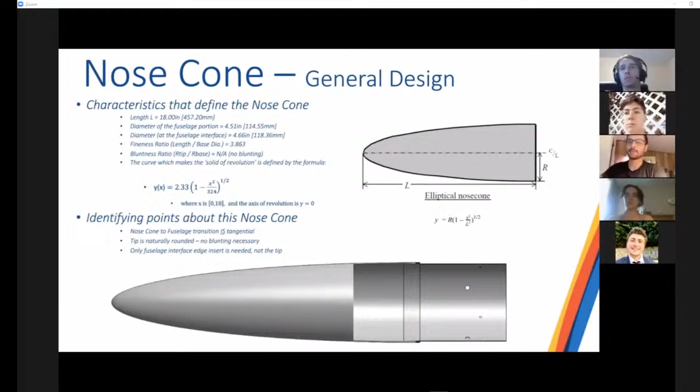So, as most of you know, manufacturing work has been going really well. The 1/3 scale nose cone has been super awesome. I've made 3 nose cones so far. I think this is the first time we've successfully made a single one-time layup and cure all at once to make one cone rather than doing 2 layups, which is super exciting because it means we can manufacture them a lot quicker, which means we can push testing a lot faster. So 2 videos have been made following the process so far.

And as I was saying, there's no tip insert for the last 2, and moving forward, we won't be using them. The fuselage insert was too thin to print this time, unfortunately, so I couldn't test with it. But the next few layups we'll be testing some different techniques as well, and just playing around with different things. There's the video links if you want to go watch it on your own time. Pretty fun learning experience.

Okay, so manufacturing tools. There's a lot here, so I'm not gonna go through everything in detail, but I'll just run through it quick. We've got the 3D printed molds, which are annealed PLA. We've got the sanding jig here, which I talked about in the video a little bit. Down here is the controls that I've implemented for it, so we've got low speed, high speed, on and off. And this is good enough for the scale model.

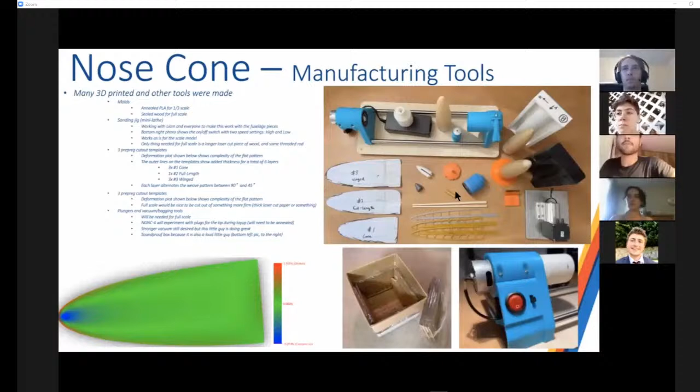All this other stuff here are just plungers for helping lay up and do vacuum bagging and everything. And this is a soundproof box because my vacuum is loud. Okay, so future work. Planning on starting the next little layup next week, changing the cutouts.

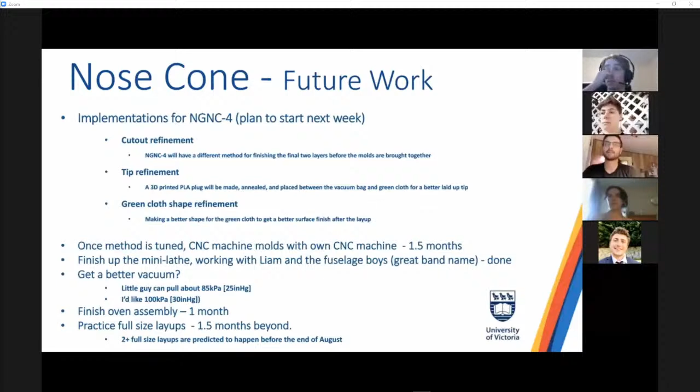Do you think the full scale will be easier because it'll be a bit bigger to do than the 1/3 scale? Yeah, I think it will be a lot easier because it's really challenging to get any tools in there and the bagging and the vacuum and whatnot. So if you had a lot more radial room for expansion of the bag, or compression of the bagging, I think it would make it a lot easier. For sure. Yeah. Cool. Any other questions?

Does anyone have any Nosecone questions before I begin? I have one quick one. If you go back a couple of slides, Carmen, I think there's some 3D printed compliant spacer things. They were in that shot. Yeah, the gold and silver ones. I remember Adam made a post about them. Do we have 3D printers big enough to make those for the full-size Nosecone? Like, are they a critical part?

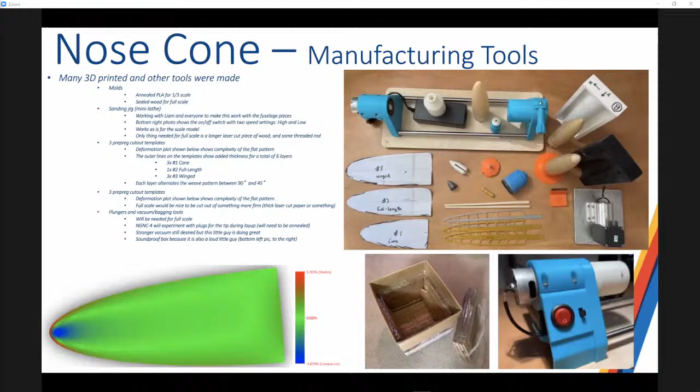They're not very critical, I don't think. I think it helps them get a slightly nicer surface finish, but with the bigger one, you'd be able to even stick your hand in, so you might not even need those. Okay, yeah. Just wanted to make sure that you didn't need like a 30-inch print bed or something. But cool. That sounds good.

One thing is that this whole process looks really good. I think he's definitely refined it, which is awesome. My one concern though would be the sanding lathe. Will we be able to scale it up to a lathe in the shop? Yeah, he thinks we can, or it'll just be good enough to do it on that little lathe. For the full size one? Yeah. Okay. We do also have a spin caster and a filament winder we can use. That is a very good point.

I'm just going to note these before I begin. Other than that, I think that process looks really good. Makes sense to me. Yeah, no, it's been going pretty well, which is very nice. All right, guys, I'm just going to take a quick drink of water before we start the air brakes. Oh.

So essentially, the function of the air brakes is to slow the rocket down using an algorithm so we can hit our 10,000 feet. And it also couples the upper and lower fuselage together. Another thing I forgot to mention is it'll allow us, on this rocket, to get some data on how they actually perform in flight. That's not just theoretical. So it's all aluminum except for the fasteners, post and plate design, and has a NEMA 23 stepper motor, which controls gear-driven flaps, which are the things that slow it down. Next slide, please.

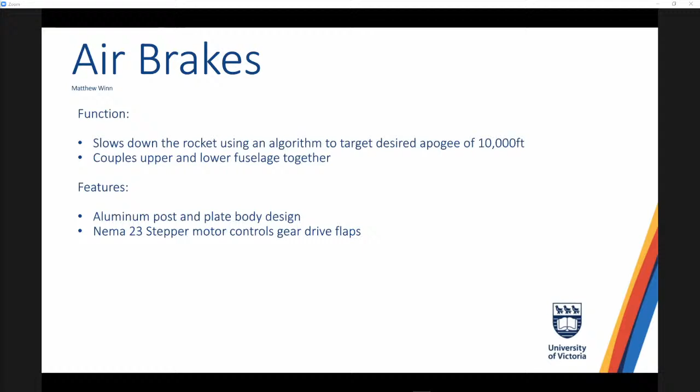For the electrical design, we have 2 A4988 stepper drivers wired in parallel, so we can bypass the current limit on them and get the full current to the motor. Those are located on a breakout board on the avionics bay, and they're attached to the Raspberry Pi in avionics.

Do you want to play that YouTube video, Carmen? I don't know if I'll mess up your full screen. It can just be small, that's fine.

So there's the breadboard, that's pre-parallel, but I've been running them in parallel now and it's been working good. So as you can see, it's pretty cool. I didn't put it in there, but the positions in that video were full, half, 3/4, quarter, done, I think. So yeah, the stepper motor is working pretty well for us.

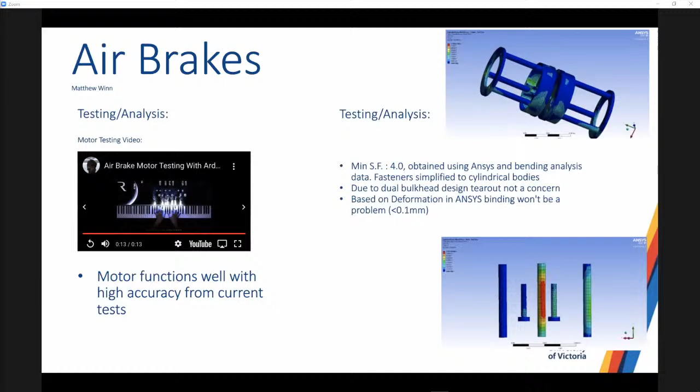Due to the dual bulkhead design, tear out isn't a concern because we have lots of set screws. And based on deformation in ANSYS, binding won't be a problem; it was less than 0.1 millimeter in the direction of the bind. Next slide, please.

Software-wise, this is where we have a lot of the work ahead. Connor and Ben have been working on it, and I have pretty good faith in them. So we're going to integrate the existing MATLAB code that the previous guys made and is semi-completed, and change that to Python for the flight computer.

The way the algorithm works is it provides a target CD, coefficient of drag, to reach our goal apogee. Then a second part takes that CD and gives us an angle for the air brakes, and through that angle, we get a step for the stepper motor, which is communicated to the stepper motor through the flight computer. This is pretty cool because it allows for minor real-time adjustments during flight. I talked to Connor, he said he should be able to finish the software within the month. Next slide, please.

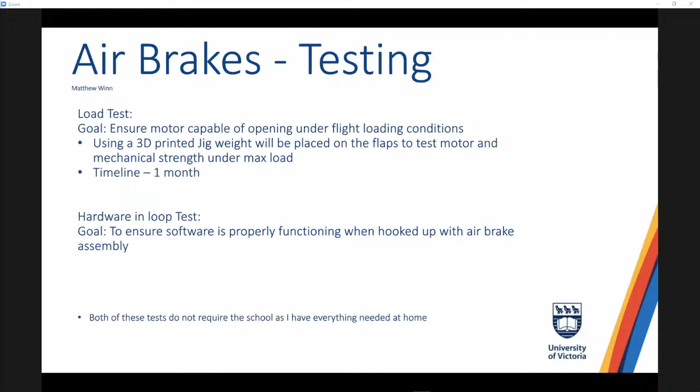And then hardware in the loop test. Once the software is done, we would want to, with the past data and predicted data, run some hardware in the loop tests and see as it goes through the whole process if it works. So that'll obviously be done once the software is finished. And as I said, both of these tests do not require the school, which is nice, so we're not really waiting on anything for those. Next slide, please.

I'm not sure, I can't remember what their budget was. Devin, you might be able to answer that a bit better as you've just seen the geometries and stuff. It definitely wouldn't be easy, it's quite a complex assembly. With time only dedicated to that, after hours, it might be like a month of work potentially.

Yeah, in their initial report too, I didn't test impact, but their impact safety factor was slightly above 1, I think it was like 1.05. So they should, big asterisk, survive impact, but obviously I can't guarantee that.

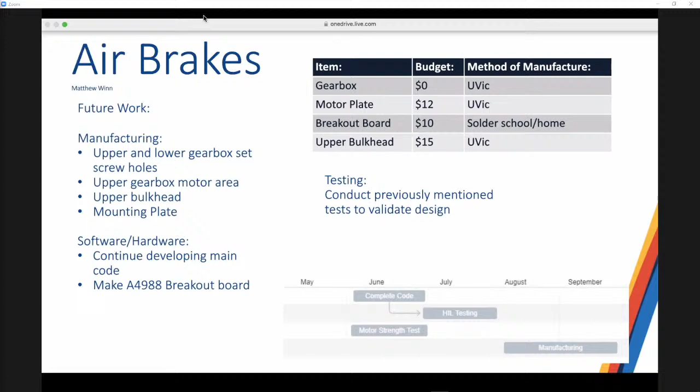So to validate this, first we determine the expected loads, then we find the composite properties, and from there obtain the safety factor. To determine the expected loads, we need to determine the failure methods, and we analyze set screw tear out, compression, and bending. Next slide, please.

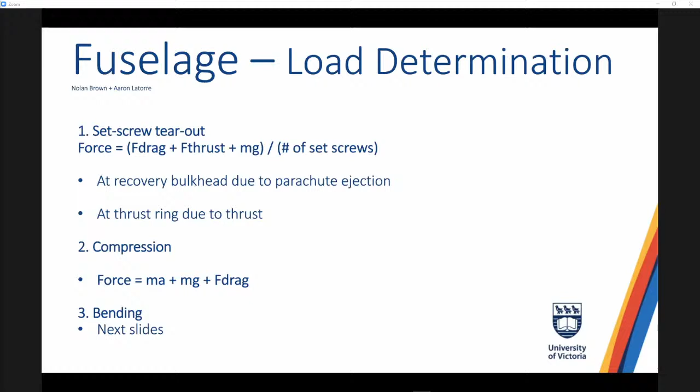Set screw tear out and compression are fairly easy to analyze. There are simple equations with drag and thrust, as well as acceleration and the weight of the rocket. We analyze these at the recovery bulkhead due to parachute ejection, and at the thrust ring due to thrust. Bending is a bit more complicated, so I'll talk about that in the next couple of slides. You can go ahead.

So essentially we do a bending analysis. It's an aerodynamic force analysis to determine the loads on the rocket during flight. To summarize the whole process, we model it as an unsupported cylindrical beam. We cut the rocket into sections at each bulkhead, because the masses of the subsystems are transferred to the fuselage through the bulkheads. From there, we can find the lateral and angular accelerations of the rocket.

As well, we'll have lift in the nose cone, the fuselage, and the fins. They act laterally on the rocket, and these all cause rotation. The main inputs here are centers of pressure, obtained through Aerolab, as well as the lift coefficients. It's highly dependent on the CAD. The centers of gravity, moments of inertia, and subsystem masses are all obtained through SolidWorks. So the output here is only as good as the CAD. Next slide, please.

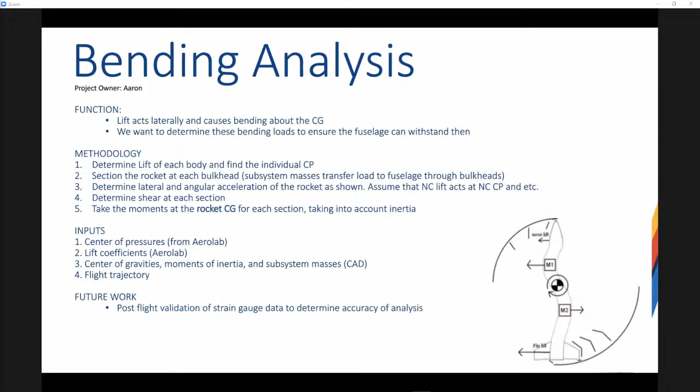I'm not going to get too into details here, but this is a force diagram. You have the center of gravity, the nose cone lift, and angular acceleration. The other lift surfaces are the boat tail and the fins. And so we have equations for both shear and moment, obtaining the lateral acceleration and the angular acceleration. Next slide.

So this is just a sample section. We cut it at some arbitrary point along the rocket. The second equation is the equation for shear: acceleration and the lift in the upper portion of the section, in this case the nose cone. The bottom equation is the equation for moment. We have three terms. The first one is an inertial term, the second is the moment caused by the lift, and the third is the internal shear. So again, we do this at every bulkhead, essentially. And you can see on the next slide,

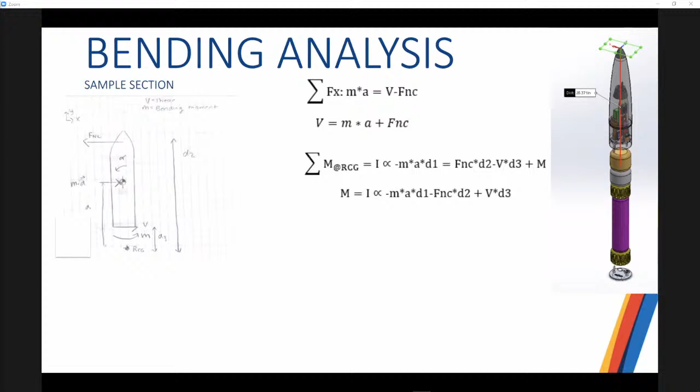So we've been pretty limited in our manufacturing testing. For the data that we do have, we have previous tear out data of around 1100 newtons to tear out one screw in a 6-layer composite. I'll talk about this main concern later when I get into the safety factors.

For our tests, we're going to do 2 main tests. One is, as I was saying, the tear out, and the next is flexural testing. This is to get a flexural stress on the composites to provide a safety factor for bending. And we'll do this using a 3-point bend test once we get access to the university. Next slide.

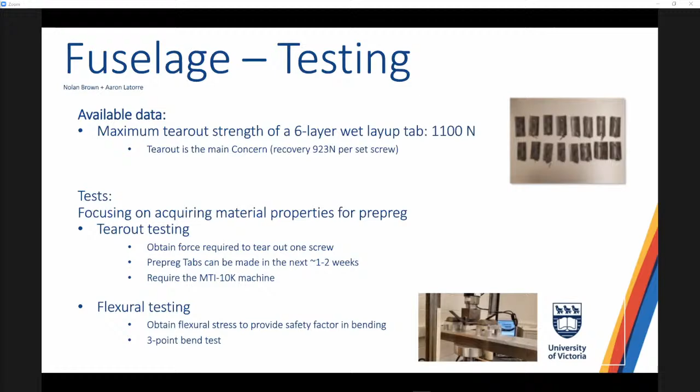So using a pre-preg test plate that Nolan made, main thing to note is it wasn't under vacuum, so future dimensions and properties will be better. Converting that plate to our fuselage will require around 9 layers of pre-preg to get our 75 thou thickness.

So we have 2 main plans for the makeup of this fuselage. One is pre-preg, which is our plan A. We estimate the mass to be around 1 kilogram. It'll be 9 to 10 layers. If this doesn't work, we'll go back to our wet layup. To obtain the same thickness, we have 9 layers of Textreme. We have all the material in hand. We know how to make it. It is less than ideal, of course, compared to pre-preg.

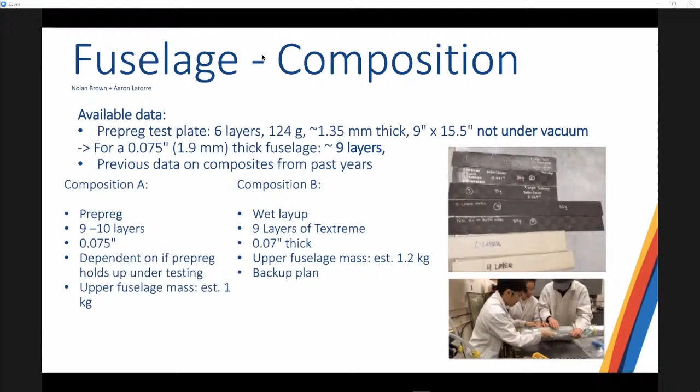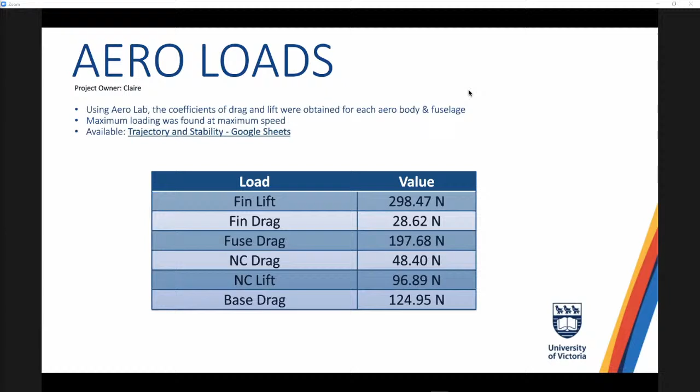Okay, that was sort of it for fuselage. Claire, you can try to bring this one up, and then we can take questions after. Yeah, so basically we're kind of tag teaming aero and flight dynamics for all the airframe stuff. Flight dynamics does loading, aerodynamic stuff. So I calculated all the aero loads. Basically using Aerolab, it'll spit out all your coefficients of drag and lift for each piece of the airframe, like nose cone, fuselage, boat tail. And I found that at our maximum speed, max Q, that's basically your maximum loading, because drag and lift are a factor of velocity squared. And these are all the results. If you need the data, it's in that spreadsheet I've linked there. Just pretty simple drag force and lift equations. And that's it for the fuselage.

Any questions for the fuselage? I just had a question about where you got that value for the load on the recovery bulkhead, because 900 newtons seems really, really low. Because we still have preliminary numbers, but we were getting maybe 1,500, 1,600 pounds. Claire, you might want to answer this one. Yeah, I was working on them with that. I gave them 1640 pounds as the total load, but it's 900 per set screw. Okay, that makes more sense. I was worried, I was like, oh man, this rocket is not going to survive. Oh yeah, these are forces per set screw, so you just divide it by set screws. Okay. Perfect. Thanks. One more question.

You're using a lot of numbers from previous launches, and we haven't had antennas on the outside of the rocket in previous launches. Specifically, I'm looking at your 4-layer twill, 1-layer fiberglass numbers. Do you anticipate any of them changing given the difference in distribution of material, since there will be kind of a bump on one side? Well, yeah, that's something we should test. We haven't really worked together too much regarding antenna. So once we start making these, some of the tests that we are planning to do is with that antenna. So we'll talk to you about that. But again, the 4-layer twill, 1-layer fiberglass is a lot thinner than it would actually be, and therefore weaker versus our anticipated 8 or 9-layer. But we do definitely need to test bumps as well as with the strain gauge.

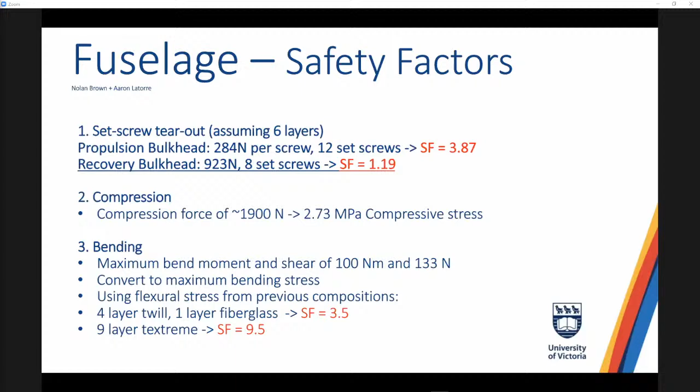Aaron, I'm not really experienced with what we've done in the past. How big is the hole, sorry? It's 3/8. 3/8. That doesn't seem like it'd be too bad, especially since I think we've had bigger cameras in the past, but something to think about again. Plus, you guys are planning to put a backing plate kind of thing behind the camera, so it's not like it's just an empty hole into the avionics bay. For sure. Yeah. Thanks, guys. That's everything.

Okay. Before I start the fins, I just had another thing about the change in temperature cracking the fuselage. The coefficients of thermal expansion for fiberglass and carbon fiber are both pretty similar. So there shouldn't be too many issues there. But yeah, definitely something to look into. Anyways, let's get started with the fins.

The design should look pretty familiar to everybody. It's a very similar design that we used on Hyak-2 and that we plan to use for Hyak-3. The only main difference is that everything was designed to be manufactured in-house. So the fin foot will be made from 6061 aluminum angle stock from McMaster. There aren't too many exotic looking curves on it. It'll be a lot easier to machine. As you can see in the bottom picture there, there's some pockets cut out as well to save machining time and weight.

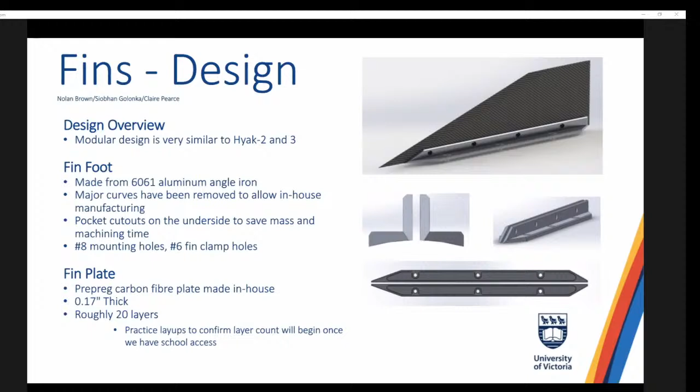And then the fin plate will be made in-house as well. It'll be a pre-preg layup. It's going to be pretty thick, probably 20 layers. We haven't done anything that thick before, but we don't see there being any problem with that. Should be all good. Next slide.

So testing. In the past, we've had a couple problems testing our fins. The main reason being they were so overbuilt and so strong that we couldn't get any results for deflection, since our jigs were basically too weak and the plate was just incredibly strong. So we've been looking into that a little bit, trying to see if we can get some different jigs, but we've also shifted the majority of testing to FEA and CFD. I'm not going to go into that. Claire will talk about it after.

But as you can see, there's the three physical tests we still plan to do. It's sort of a backup plan testing method, but we do hope to still get three safety factors from that. And then in the top right is just a quick timeline of how we plan to do everything. But yeah, that's everything for the aerostructure side of the fins.

Hi. So onto the flight dynamics side. So first, we got the sizing. Basically, if you don't know, the fins are responsible for stabilizing the rocket. They basically bring the center of pressure aft. In general, increasing stability is increasing drag. So the sizing is kind of balancing performance versus stability.

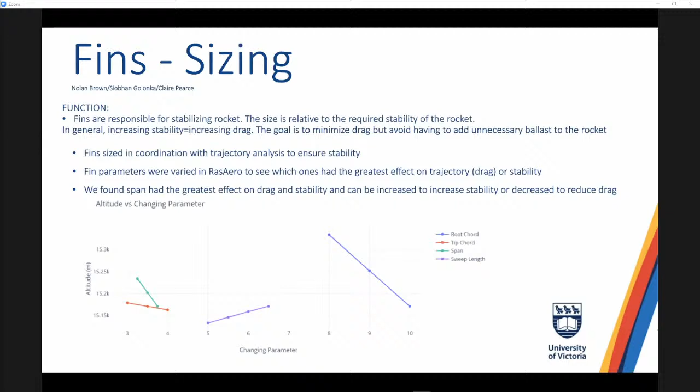One of the flight dynamics members, Karnika, helped me with this. So the bottom axis there is inches, and the y-axis there is altitude. Basically we found the center of pressure, found how much ballast we needed, and tested how the apogee changes. Basically, as expected, any increase in area is an increase in drag, and the span has the greatest effect on drag and stability. So that is kind of the key parameter to watch out for. So you go to the next slide.

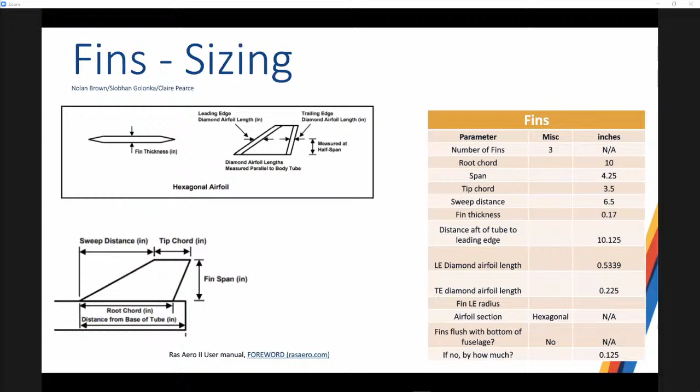So I just have some pictures to show you guys what the actual parameters mean. The fins we settled on have a 10-inch root chord and 4 1/4 inch span. Those are kind of the key parameters. If you guys want to read through the rest, you can. And 0.17 inches thick, as Aero said. Yeah, so they are smaller than the Hyak-3 fins. So they should be less mass, less drag, but they're the size we need for our stability. And so if you move on to the next slide.

So yes, Flight Dynamics is in charge of the structural analysis, like failure analysis of the fins, theoretically at least. So we're concerned with the fin under bending load from lift and also with fin flutter. So the first thing we did was just run a really simple FEA with the estimated lift and drag as a point load in the center of the fin, just as a sanity check, because you don't want to dive right into FSI and have some super whack results. I don't have the results because they're not super accurate to what's actually going to happen, but pretty low, like a couple of megapascals.

Next, we did a one-way static FSI, which basically means do a CFD sim, get a pressure plot, put that into FEA, get a stress plot at Mach 1.2 and 1 degree angle of attack, basically wider angle of attack, higher lift loads. But it seems like we should be expecting a narrow angle of attack from previous work and research. Because we don't know material properties, I just used the carbon fiber prepreg option in ANSYS. And we modeled it with all the bolts.

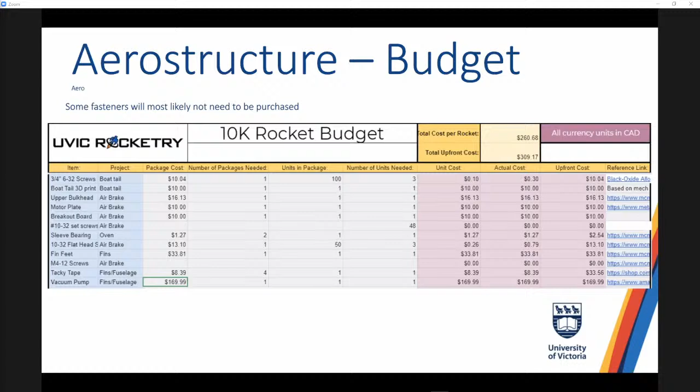There's the Aerostructure budget. I also didn't know. I just read the thing. You don't need to have budgets on the slides. So, yeah. Let's skip that.

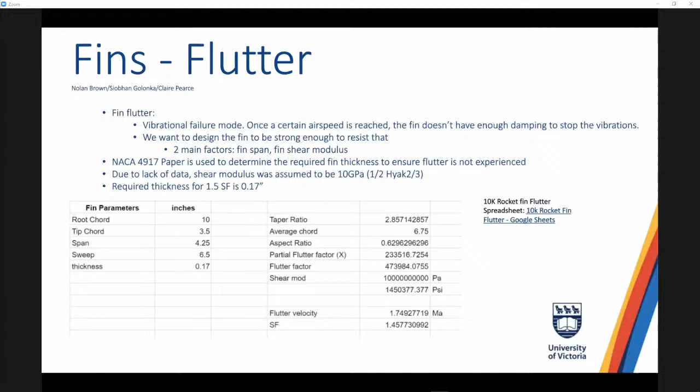One question for Claire. You used Mach 1.2 for the fins. Why? I mean, it's good to have a higher number, but since the rocket isn't going to be achieving even Mach 1, that seems like a lot. At the time when I did that simulation, that was our top speed, actually. It is slightly lower now, but we are reaching just above supersonic speeds. Cool. Okay, thanks. No worries.

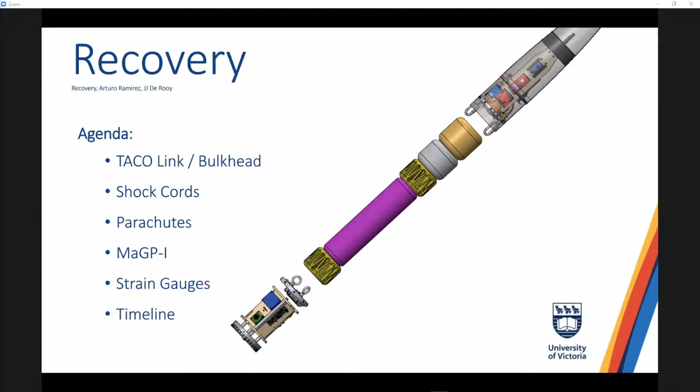Okay, so JJ and I will be talking about all these elements of our recovery system, starting with the bulkhead. So next slide, please. Okay, so here is the recovery bulkhead. Quick specs: 4.5-inch diameter, made out of 1/2-inch thick 6061 T6 aluminum, and all of the mass, that includes eyebolts, fasteners, and everything, total mass is 1 pound. That doesn't include things like the shock cords and stuff, though. This is just for the bulkhead.

For the bulkhead design, same as usual. If you've been to a Hyak-3 FDR, or whatever, you know about TACO Link. It's the usual setup. We've only made a few minor changes to that release mechanism. And one of them was that we shrank the size of the slot there just to keep it away from the radial holes. And yeah, that's actually about it for TACO Link. Everything else is the same as it was before.

And then for the drogue ejection, originally, I think in the PDR, we had black powder cups that mounted to the bulkhead. They were like a little machined aluminum cup that would sit mounted on top of the bulkhead, and that would be filled with black powder. Then that would be ignited, and that would blow off the nose cone and eject the drogue parachute. But we did a little bit more research, and we figured that we can actually just make the pocket right into the bulkhead and then have a little cap that sits on top. You can see that in the bottom of the bulkhead there. So that just saves us a little bit of space.

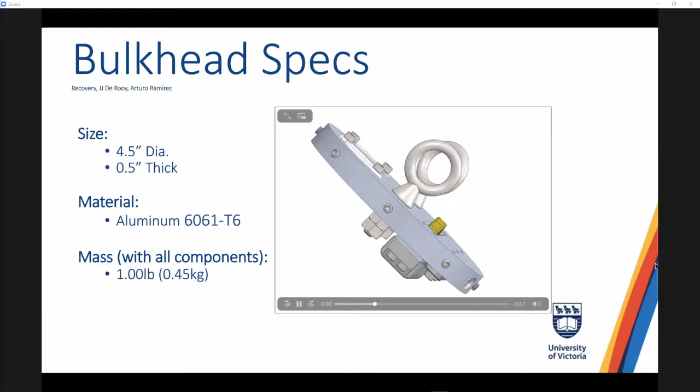And then one other small design change is instead of using an 8 contact terminal block on the back of the bulkhead, we are now using a 6 contact terminal block. That's just because we made the slot smaller, so we can make the terminal block smaller. If you go back one slide, you can see that a little bit better with that animated video. You can see there on the back that we've dropped down to a 6 terminal block. And so next slide, and the one beyond that as well.

So for the TACO Link, we did a bit of analysis on the drogue parachute. We've had issues with this in the past, getting a good number for how much load will be on the drogue parachute. And in turn, that load is distributed to the TACO Link. So this time I took a bit of a different approach, and I assumed that the shock cords are rigid and that the drogue parachute is fully inflated when the load is applied to it. That's the worst case scenario because it's going to provide the most drag.

The key difference in this type of simulation is that the load is actually the drag load on the parachute, as opposed to the shock cord stretching and things like that. So we assume that the parachute is deployed, the rocket falls, and the shock cords go tight. They are completely rigid, and the moment the shock cords go tight, the rocket fuselage is moving at a certain velocity and the drogue parachute is moving at that same velocity. Using that velocity, we can calculate the drag.

So after talking with Claire, we got our horizontal velocity at apogee, and then we add that to the velocity gained by falling back to the Earth from apogee. And we came out with a number of 255 pounds of loading.

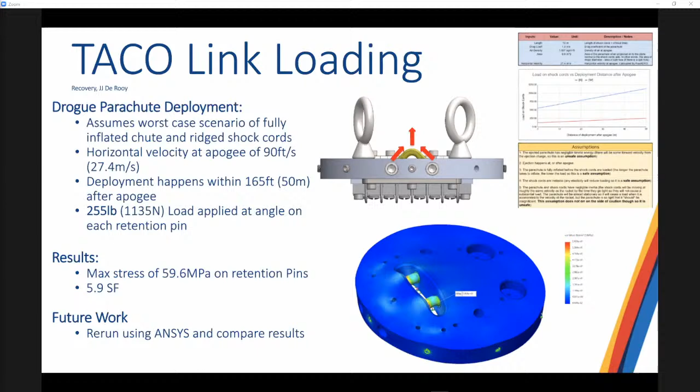So as part of our simulation, we applied that load to the TACO Link tether, which is that yellow thing there, and you can kind of see forces pull on the side. And using SolidWorks, we got a safety factor of 5.9. So in the future, we want to also run this with ANSYS, but never really used ANSYS that much, so I just did it in SolidWorks. Next slide.

And then I'll let Arturo take over here, and then I think Claire will also touch on this. Yeah, so this is the bulkhead analysis using the load from the main parachute. This is something that we had a lot of trouble calculating a right estimate. Our best estimate so far is 1,640 pound load distributed between the two eye bolts. We got this estimate from a MATLAB script that Nick wrote, but we're still having some issues on getting that right. But based on a previous estimate that was the closest thing that matched our current estimate, we expect that that is an extremely high estimate.

So once we get it right, it'll be a lot safer, I guess, than this one. So it's good that we're testing on a very high estimate. So I'll let Claire talk about the FEA. Sure. Yeah, so I did the FEA in ANSYS. I included the bulkhead, the pins, and the bushings. For sake of not having a billion contacts in ANSYS, I did not model any of those terminal blocks and stuff under, because I don't think they should affect it too much.

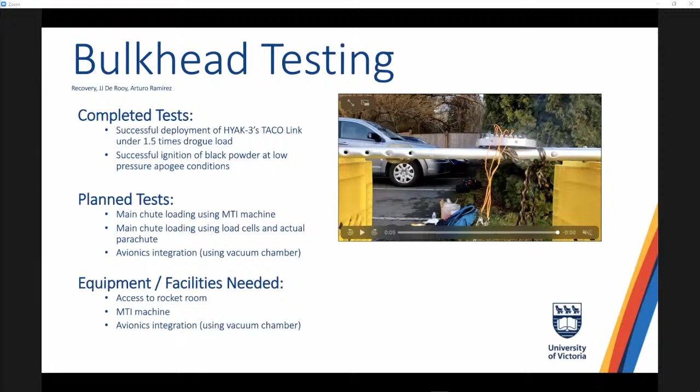We have also tested the low pressure ignition of black powder, and that was done by Paco. He created a vacuum chamber and was able to successfully ignite black powder at 10,000 foot pressures. So we're not worried about that. In the future, we're planning to do some tests with the MTI machine at the university, loading from the main parachute and also from the drogue parachute, just to double check that everything doesn't fall apart. And then we also want to do a realistic test where we take the mass of the rocket, attach the main parachute, have load cells in line with the shock cords and throw it off a building or something, and finally get a number that we can trust for the main parachute.

But in order to do that, we need access to the rocket room, the MTI machine, and also all the avionics equipment to do sort of the vacuum chamber, like low pressure parachute deployment stuff. Next slide.

So the shock cords basically just attach the parachute shroud lines to the recovery bulkhead, and there's one for each parachute. We've been having some issues as well with getting the right calculations and some good sources on the sizing of the shock cords. The strength will depend on the load once we get a better estimate for the load, and JJ is going to talk about that in a second. But in terms of length,

we haven't gotten too many great sources, but basically we just want to avoid zippering. When the parachutes are deployed, if you say this is the fuselage, it's going to have some horizontal velocity, so the cords are going to shoot out, and because of the drag on the parachutes, they're going to fly backwards. Zippering is when it tears along the fuselage. To prevent that, you need 4 to 5 times the length of the fuselage, just to give it enough time to slow down.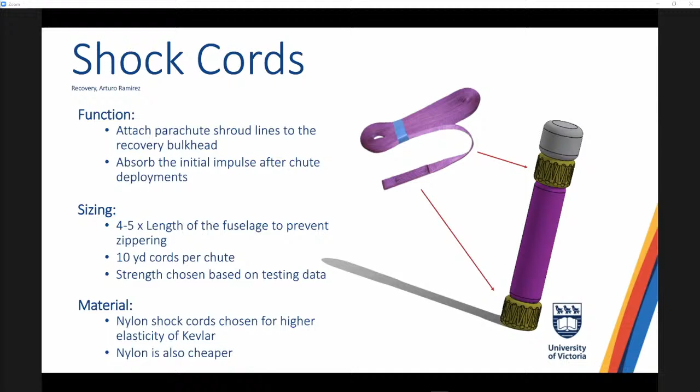So the testing for the parachutes is not too complicated. The main thing is making sure that we finish sewing the parachutes, and that's going to take probably a couple of weeks. That's the hardest thing. After that, we have 3 tests planned for the parachutes, and they're fairly simple. One of them, the shroud line load stitch test, does require the MTI machine.

So on top of requiring the university for the materials and the sewing machine, once we finish that, we're going to need the MTI machine. So it looks like we might have to wait for the university to open before we begin the parachute testing. Next slide, please.

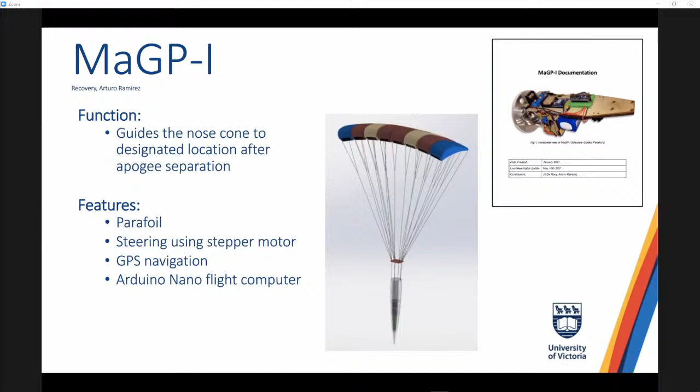Okay, so MaGP-I. I'm just gonna go over it briefly before I go into the software, which is the main thing I want to talk about. MaGP-I, which is a machine-guided parafoil, guides the nose cone to whichever location we want after apogee separation. Unlike previous years, the nose cone is going to fully separate from the fuselage, and it's going to steer the parafoil using stepper motors controlled by an Arduino Nano flight computer using GPS. So next slide, please.

The software was written by a previous student, River, but I've looked over it and I've verified it and written some pretty in-depth documentation. So if you guys want to look over that and just make sure everything's fine, you can do that. But basically, we just wanted to make sure that there were no issues with the software, and we wanted to make sure that we knew all the launch-specific parameters that we had to change for flight.

And so that includes things like coordinates, altitude, the number of circles that it's going to perform as it descends, things like that. And so using data from a previous test on the parafoil and a spreadsheet that I made, we came to a total of 17 circles that it's going to make as it descends, which would take about 40 minutes. And that might be an issue. I believe we've contacted Adam about that to see if it is an issue. If it's not, then we have some future work and testing. So I go more in depth about that in the next slide. So next slide, please.

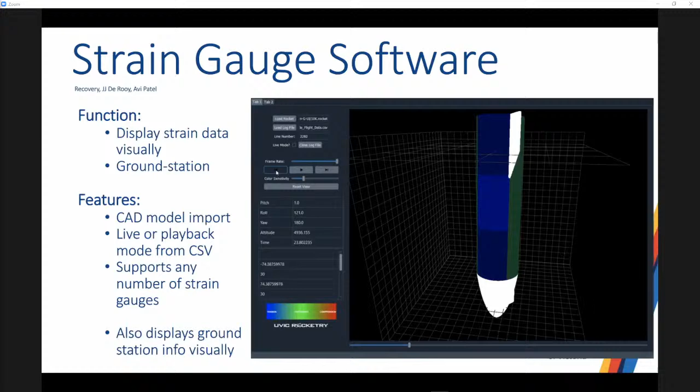And I actually have another piece of the software that I want to demonstrate live. So if I can share my screen here, Carmen, I'll show what's happening there. Thank you. Okay.

So something that we haven't really shown before is the ground station. Basically we have a whole bunch of graphs here that will display altitude, gyroscopic data, things like that. So this is kind of like a more visual version of the ground station that Avionics has, an addition to their system already.

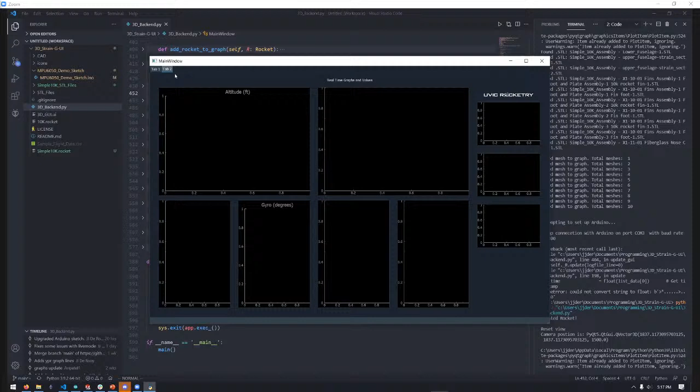And we also have support for .rocket files. So we can have different files in here, different rockets, different CAD. So I've created one modeled after the 10K rocket. This was using 10K's fuselage and things like that, so this is an accurate representation of that.

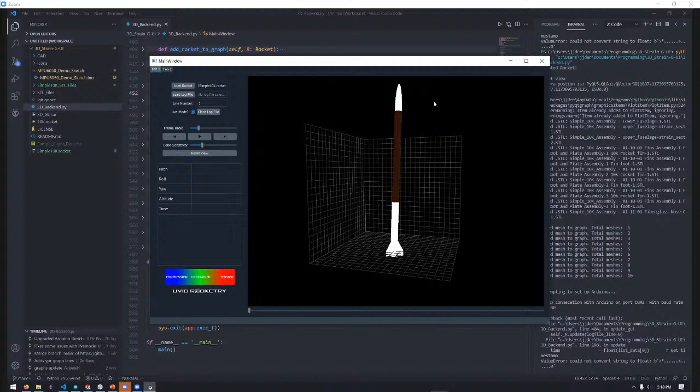And I've modified it so that it actually has 2 strain gauge sensors, which I have hooked up to a piece of metal sitting beside me here, as well as a gyroscope. So if you look at my camera while I'm doing this, I have a breadboard here with an accelerometer on it. You can see as I spin it around and move it, it moves on screen.

And then also it has strain gauges built into the rod. So if I flex the rod, one side is in compression, one side is in tension. And if I bend it the other way, one side is in compression, one side is in tension. So this is what we'll get from the actual rocket, except with 12 sections instead of just 2. So that's one of the big improvements that we've made since the PDR.

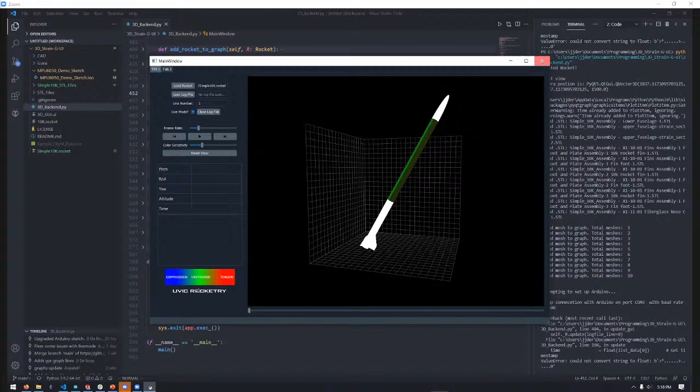So I will let you take it back, Carmen. And next slide. Okay, I'll pass it back over to Arturo.

Yeah, so the timeline is going to be very tight. As you might have noticed, all of our testing requires manufactured parts or access to the university. So I talked to Devin and he gave me an estimate of about 2.5 weeks for manufacturing. So assuming we're able to start manufacturing once we get back to the university, and that we're also going to start making the parachutes right away, then testing might have to begin probably a week or so into that, once we have enough components.

And because we do have a lot of tests, it might take us 5 weeks if we complete 2 tests per weekend, which gets us right up to the beginning of October. So it is pretty tight for a competition. We might need some help from other subsystems to complete these tests. Otherwise, we're going to be very tight on time if the competition is in October. That might be an issue. So are there any questions about anything?

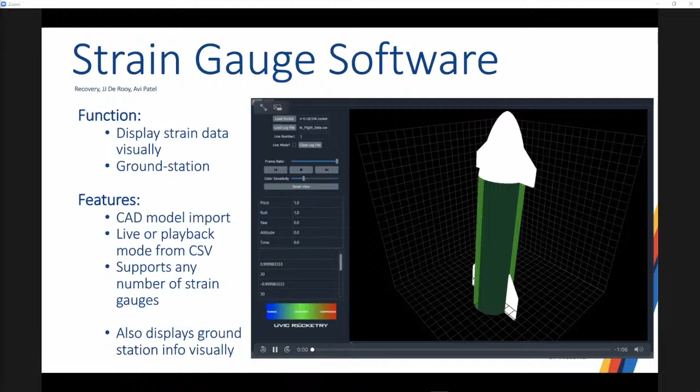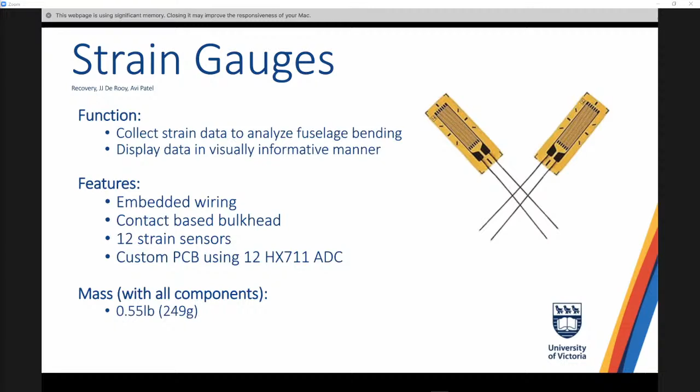Sorry, I always call it the flight computer, but I mean the avionics bay, I guess. The wires run to the avionics bay and connect to the altimeters, is what you're saying. Okay. Cool. Yes, I just want to make sure that was clear. Good. Yeah.

That 2.5 week manufacturing period, is that based on if we manufacture nothing but recovery in those 2.5 weeks? Or is that accounting for all the other manufacturing projects that are probably going to be happening at the same time? I can speak on that. That is assuming that we'll all be manufacturing everything at the same time. Obviously, we have a lot of parts that are very similar, i.e. the bulkheads are cylindrical plates.

They have very specialized processes for making those radial holes. So to streamline the process of making so many, it's easiest to make them all at the same time, because using what's called a dividing head to break up the rotation of the disc on the mill to make all of those holes is time consuming to set up and tear down. So trying to do as many as we can in one sitting is ideal. So I guess that 2.5 weeks does account for all manufacturing.

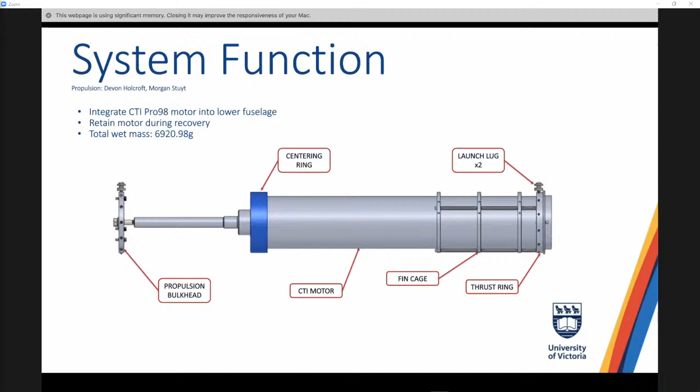The propulsion bulkhead keeps the motor in place during recovery chute deployment. In previous rockets, I know it was intended to be a backup for thrust transfer compared to the thrust ring, which we'll get into later. However, talking to Morgan, we determined that if we are bottoming out on the propulsion bulkhead and something with the thrust ring is not working out, then we probably have bigger problems. But we can talk more about that in the thrust ring section.

As you can see, it's just a bulkhead made out of aluminum. It's also the lower bulkhead for the air brakes. It's just an aluminum disc with 12 set screws, and a 3/8-16 hex bolt attaching to the extension post that was added for the extension of the lower fuselage, basically making a big screw. We have some threaded rod on the end. The required validation for the bulkhead is just loads under main chute deployment, and just for fun, we did the max air brakes load at full extension. Next slide.

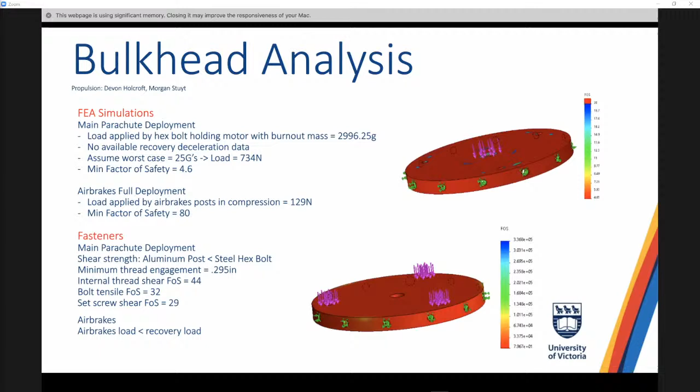So we didn't do any analysis there. Next slide. Now the centering ring. So the centering ring locates the motor radially during assembly. This is our fun 25% infill PLA version. And its features include being lightweight at only 36 grams. And there's no validation required for this guy, just for locating during assembly.

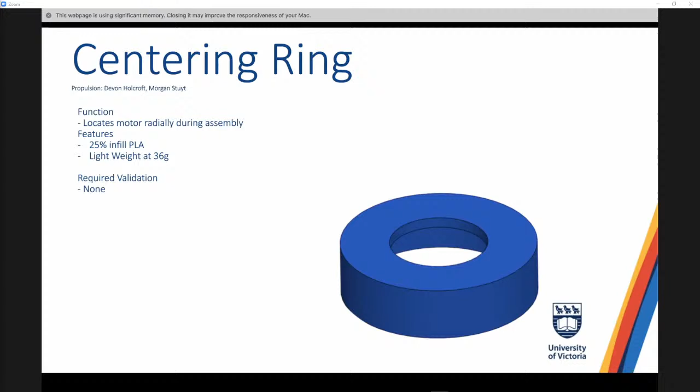Next slide. Moving on to the fin cage. So where the centering ring was at the front of the motor, the fin cage locates at the back of the motor. It also fixes the fins to the rocket. So some of the features include unidirectional weave carbon fiber posts. That was what was selected for the Hyak-3 version, and the design was kind of transferred over here.

Those are available from McMaster. I don't know too much about composites, and I don't know if there is going to be much of a difference between unidirectional versus cross-hatched carbon fiber posts. But that's what was in the CAD. And those are connected with expanding aluminum inserts to replace the aluminum posts used in previous years.

And so the required validation was thread tear out for the fins on each ring, and then bend testing on the carbon posts. Next slide. So the analysis done was pretty crude, just a worst case scenario moment arm on the fins for lift force, to calculate the tensile safety factor on that top screw. Again, over 30, so fine there.

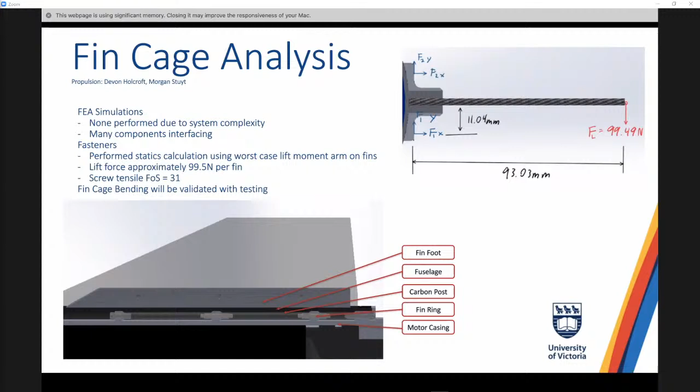In terms of the bending of the fin cage itself, no simulations were able to be performed because there are so many components interfacing with the fin rings connected to those posts, or interfacing directly with the motor casing, and then being held together by the fuselage, as well as the diameter bottom of the fin feet. There's just too much interacting to have a relatively accurate simulation, so all that bending, and determining whether any load on the fins will be transferred to the carbon posts, will have to be validated with physical testing.

Next slide. So moving on to the thrust ring. The thrust ring serves as the base of the fin cage, as you may have noticed, and it also transfers thrust through the bottom of the fuselage. It's also aluminum, with 12 6-32 set screws, and the only required validation was the motor's thrust transfer from the back enclosure of the motor. So that's in the next slide.

For another SolidWorks FEA, that loading was placed on the interface between the back motor enclosure and the thrust ring, just on the back face, with a thrust of 2,952 newtons. We had a minimum safety factor of 4.7. And for worst case fastener calculations, if for some reason we bottomed out on the set screws before the lip of the thrust ring on the bottom of the fuselage, we got a set screw shear factor of safety of about 3.3 per screw. Yeah, next slide.

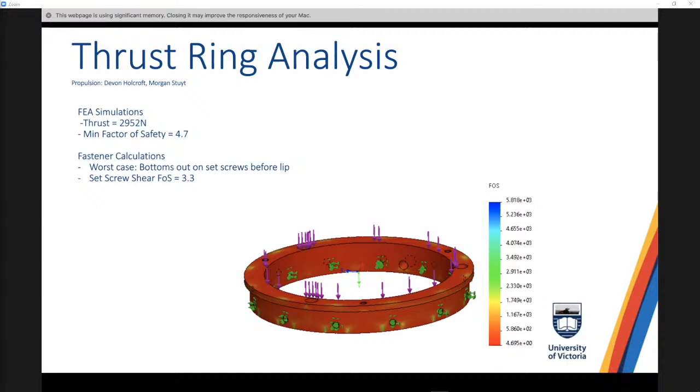So quick little diagram about assembly. How everything goes together is obviously important, and it can be broken up into two initial stages. We assemble the motor all together first, and then applying Loctite to the threaded rod, we bottom it out on the front enclosure of our motor. You can use two nuts to basically make a bolt and screw that in all the way, then put on the centering ring, more Loctite for the other end of the threaded rod, and then use a pipe wrench to bottom out the extension post onto the front enclosure.

The fin cage doesn't slide over the motor. We actually install it first, making sure the thrust ring bottoms out on the bottom of the fuselage, and then we install the propulsion bulkhead above the fin cage, threading the set screws into the fuselage, and then finally sliding the motor and extension post in. We can simply tighten down the hex bolt at the top of the bulkhead, cinching everything together and completing assembly. So next slide.

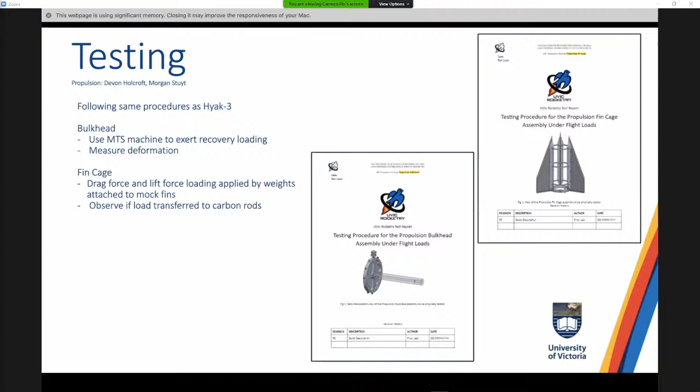And yeah, that'll be done with the drag and lift forces applied. I believe the plan is to again use a kind of worst case point load for both of those tests. The next two slides are both budget slides, which again didn't need to be there, so we can just skip those and go straight to the question and feedback period. So do you have any questions?

One thing for you to note, you mentioned you didn't know what loads to expect. We have data from a few of the previous 10K rockets, I think MVP-1, 2, and Skookum-1, so you can use data from those if you're looking for more specific expected loads. 25 Gs is what we spec the electronics for, because it was either that or go significantly below expected loads. So it's still higher than needed, but if you're looking for more accurate data, it's in the Avionics folder.

Okay, great, thank you. Yeah, that was JJ and my solution to not having any expected deceleration for this rocket, but I hope deceleration is less than 25 Gs. It has been every time previously. I just looked and we were looking at 10 Gs and 13 Gs for Skookum-1 and MVP-2. Okay, cool. Well within. Great, thank you. I'll just write that down.

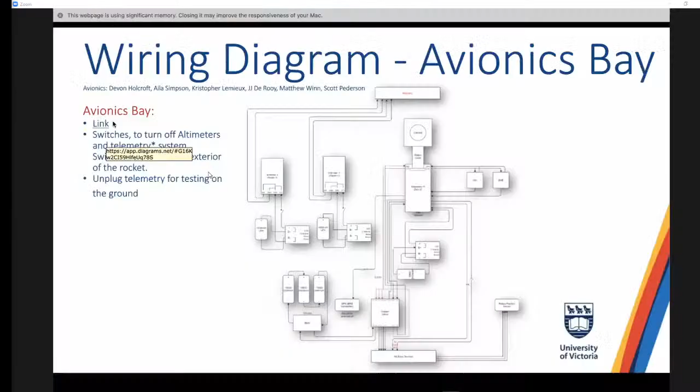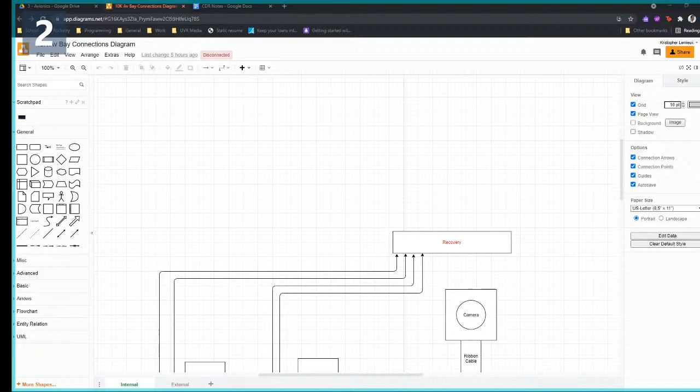I'm also biased because I put a little ninja edit into it, so I want that to show up. No, it will be really helpful once we can zoom in because we can see how all of the components across the rocket work, which is going to be really helpful.

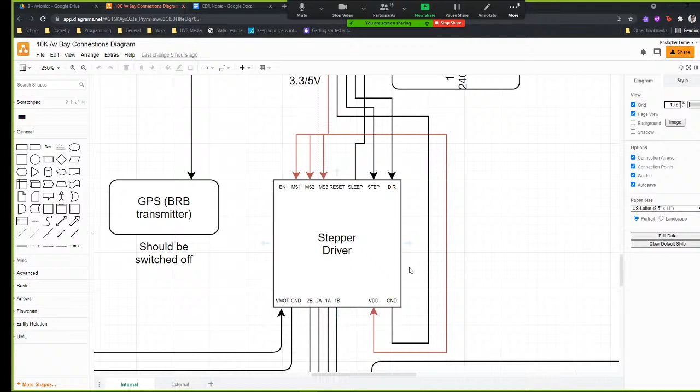Yeah, if you want to zoom in there a little bit just so people can read. Perfect. Yeah, so the main two functions of the flight computer are the direction and step pins there, and then it also provides the logic voltage to MS1, MS2, and MS3. And then the sleep, Devon let me know, it allows it to go in low power mode, so then we don't have to have the stepper motor constantly having holding torque, which uses a lot of power, until we're ready to fly. And yeah, those phases go to the motor, and it has its own external power supply.

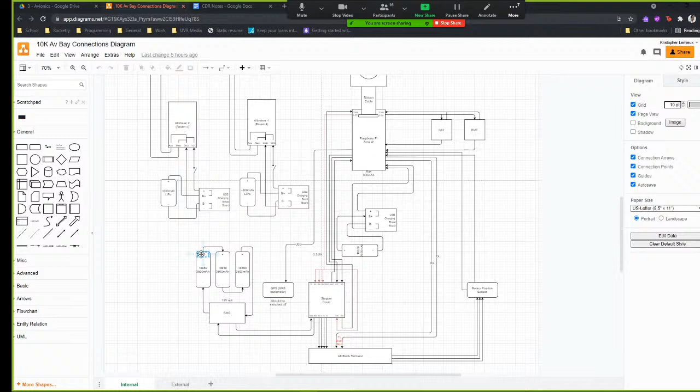Yeah, I just put it in the chat, but your batteries down there, the 18650s, they look a little backwards in terms of polarity if they're supposed to be connected end to end like that. Yeah, like plus to minus. Cool. Flipping the middle one 180 degrees would fix everything.

One thing I'd like to point out while we're on this, it'll come up later as well in the telemetry slides, but it's helpful to note here, is since we have an external antenna, we are going to have an area of the rocket skin that we're not going to want people to touch. Since we do have to carry the rocket out onto the rails and assemble it, we were trying to figure out how we can turn off the entire telemetry system while it's still on the ground.

So the fact that it connects over USB means that theoretically we should be able to tell it to not supply any power, and there will be external power going to the transmitter, in order to power the antenna up to the full 5W output. So we're just trying to figure out how we can put another screw switch, like with the 2 altimeters, onto that wire so that we can make sure that we don't give anyone radiation burns while they're carrying the rocket, because apparently that's not ideal.

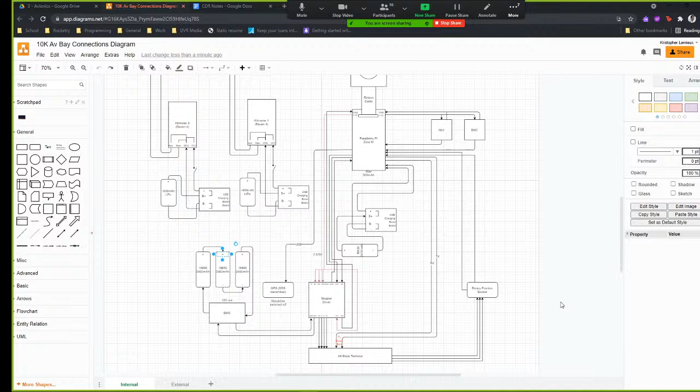I had a quick question. Matthew mentioned that the stepper driver will be on sleep mode until it wakes up. What tells it to wake up? Under what conditions will it wake up? Yeah. That is a good thing, though. We have to put that in to let the program know to start. Yeah, we're not going to have any communication back to the rocket. The rocket is sending us information. Yeah, that's what I mean. Like, just a switch so that it turns on or whatever. But that won't help. The switch is going to have to be done once it's on the rails. And once it's on the rails, it could be sitting for 6 hours. Well, not 6. We've spec'd it for 4 hours.

But we could say once the acceleration exceeds a certain amount, because that will be coming from one of the gyroscopes going to the Raspberry Pi. But we haven't tested to make sure that we can do that. It's possible, though. But if the Raspberry Pi is in sleep mode, we just need to make sure it can still record sensor data. That has not been accounted for. Yeah.

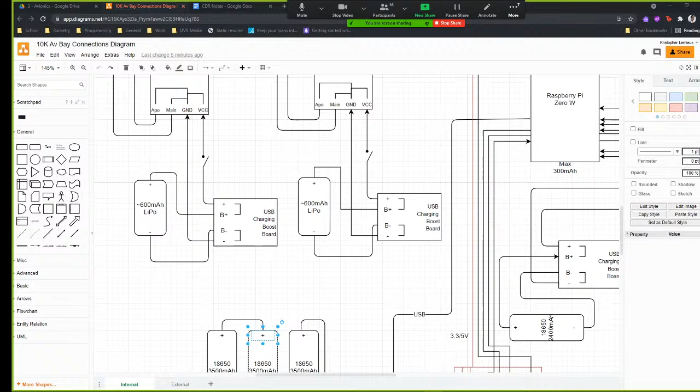Sorry, quick question: are those USB charging ports accessible once the rocket is assembled, or are they enclosed then? So like I said, there will be charging boards for the altimeters. But the one used for the Raspberry Pi is outdated from the renders. It's actually connected to the

internal battery section, so the entire battery housing is all self-contained and can be charged externally from there, but once it's inserted into the avionics bay, it's no longer accessible. Okay, thanks.

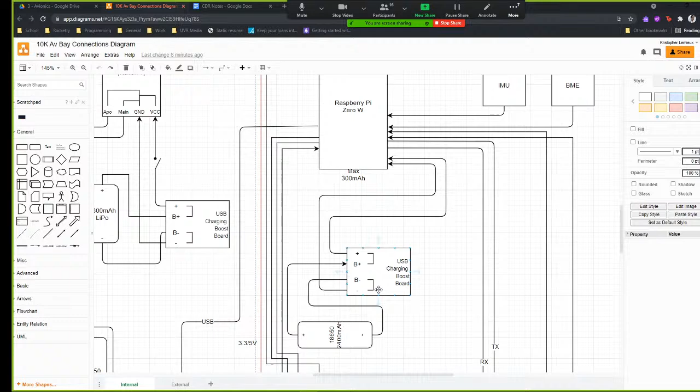Okay, is that all for this slide? Are we good to move on? Okay, I'll take that as a yes. I'll pass it back over to Carmen. Okay, so I guess we go into batteries, which is Devon.

Cool. So the batteries provide power to our flight computer, which is using one of those USB charging boards. It boosts the 4.2 volts out of the 18650 to 5 volts for our lovely Raspberry Pi, and then separately, connected to that 3 series BMS for 12 volts to our air brakes, is another 3 18650s.

That 12 volts is also supplying the telemetry system, and the telemetry system is rated for its high power mode between 9 and 16 volts. That second line is wrong. We don't need 9 to 16 volts of power to each altimeter. We're using those small, I believe 600 milliamp hour LiPo batteries, which are 3.7 volts.

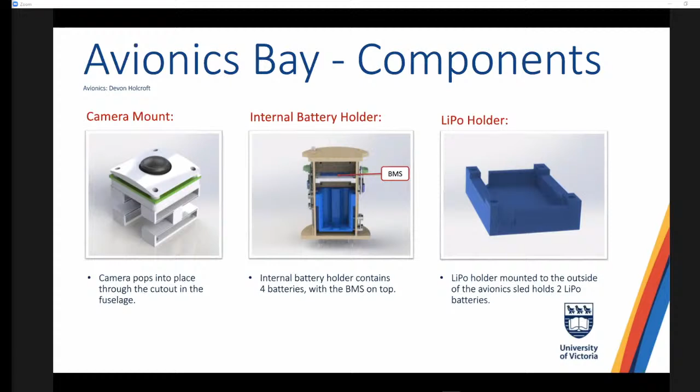Okay, we're good to go.

Okay, great. The avionics sled. So the avionics sled contains all of the electrical components as well as the batteries. It is a lightweight 120 grams. I guess that's the dry mass with just the laser cut plywood and the aluminum posts. I don't believe that's accounting for fasteners, but either way, it is just under 5.5 inches tall from the bottom of the attachment posts to the top of that top plate. And then the outer diameter is obviously the fuselage inner diameter.

In terms of testing, assembly rehearsals will hopefully be performed to tweak wire cutouts and spacing of components. Obviously, we don't want to be screaming at, well, me for designing it at 3 a.m. when we're assembling everything, wondering why we can't fit wires through different spots. And so

rather than trying to get it right the first time, we're going to make it. The laser cut panels are very easy to cut again and iterate upon. We'll be able to tweak things and make sure we're iterating for usability when wiring on launch day. But yeah, that is this. So next slide.

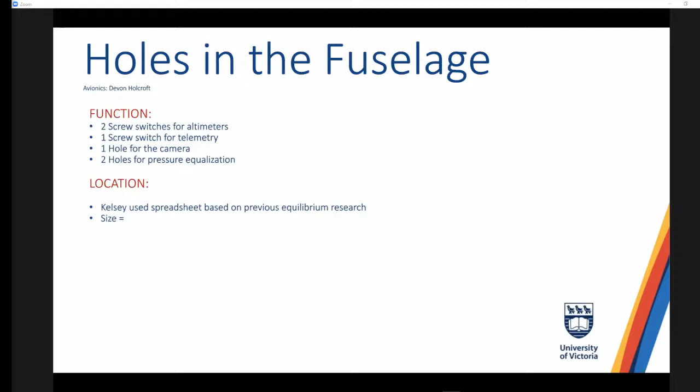Flight computer. So we selected a Raspberry Pi Zero, small, low power consumption, and it does everything we need it to. It's going to take in all of the data from onboard sensors and then configure it for storage, probably in a CSV format on the black box, as well as configuring a small APRS packet with all the data we deem to be relevant so that that could be sent back to the ground station.

It'll also be calculating the position for air brakes, taking in its encoder data and calculating how the stepper motor needs to move to make sure that they are where we need them to be. That will likely be based on a PID algorithm, so that way we can make sure that things are as precise as they can be.

So the Adafruit sensors are going to be collecting temperature, humidity, pressure, velocity, acceleration, yaw, pitch, roll, all that fun stuff. And we've calculated 23 I/O pins are going to be used. Most of these go to the strain gauges. The rest go to some various sensors. As mentioned earlier, the camera will be connected via ribbon cable, and the transmitter unit that we're using connects via USB.

Analysis and research, a lot of this is going to be done while we are programming and testing everything. We selected a Raspberry Pi, which is a little bit unconventional for UVic Rocketry, because this year we wanted to have an easy basis on which to integrate new team members, make sure that everyone felt very comfortable with what we were doing, so that everyone could learn and we could build off of that.

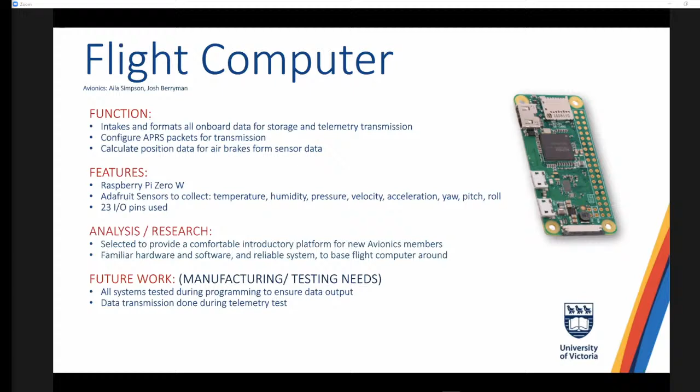Future work, testing. So all the systems will be tested during programming. We'll be making sure we can get information from the sensors, provide information to everything that we need to.

Yeah. Telemetry system. Oh, sorry. Yep, I was done there.

Telemetry system. So we have selected the Big Red Bee 2-meter GPS VHF transmitter, as well as the recommended antenna, also made by Big Red Bee. These will work together to transmit our GPS location to the ground station, along with some data points. So these transmit a signal over a protocol called APRS, Automatic Packet Reporting System.

And we can configure a small message, a small piece of text to send along with each transmission, and that is basically going to be encoded data from our sensors. So we can just put some numbers, we know what numbers to expect where, and then the ground station can receive that, decode it, and we'll have all the information that we need to know what's going on.

The antenna is 38 inches, about a half wavelength, mounted externally between the carbon fiber and fiberglass layers of the fuselage. So it'll be outside of the carbon fiber, so it is not in an RF non-transparent tube, and underneath the fiberglass in order to protect it. VHF has longer wavelength than UHF, so it was much better for long distances. The setup we're using here specifically is designed for high altitude weather balloons.

So in past years, we've had some issues with getting back data and being able to actually pick up all of the packets. Hopefully this means that we will get everything, even with whatever antenna we're using on the ground station side. The tests that are going to be conducted will be the long range distance test. So we're going to have a bunch of people go up and climb Mount Doug and then find another suitable place to transmit from. Great outreach event.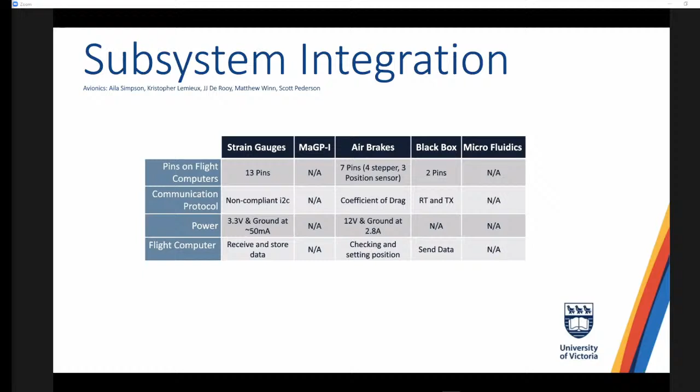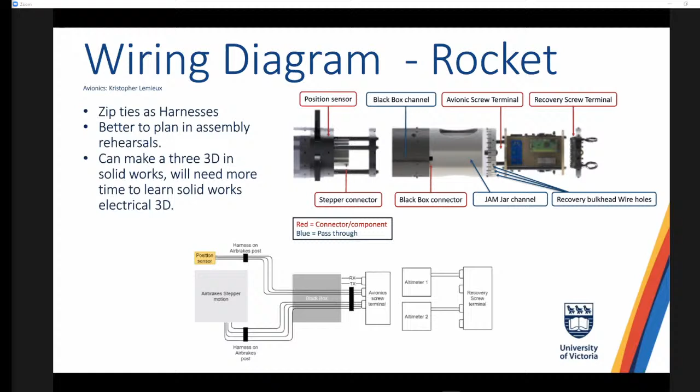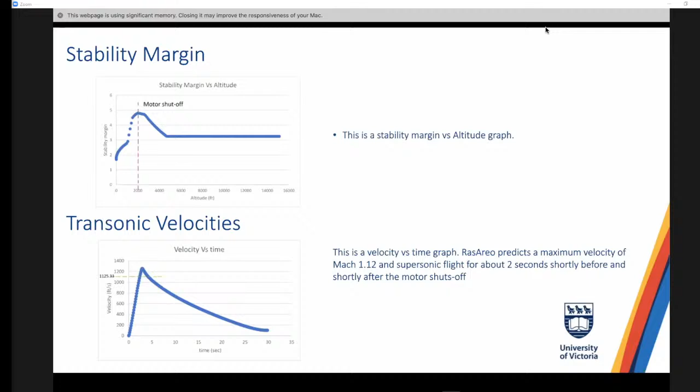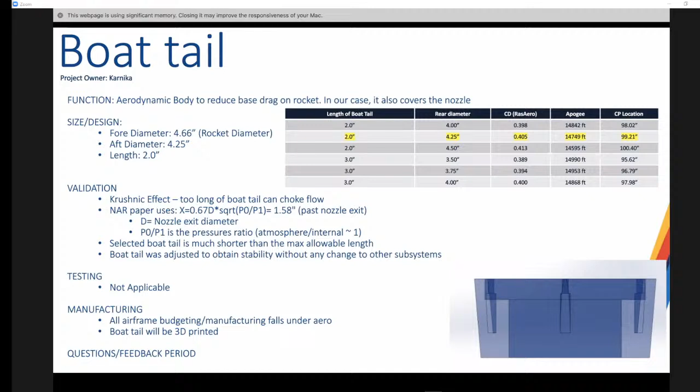We're just going to 3D print the boat tail, since we're all tight on manufacturing time and manpower. So I think it makes sense to have something that's really easy and cheap, so 3D printed out of PLA. Yeah, I think that's it for the boat tail slides. So if anybody has any questions or feedback.

So Avionics is going to need to calculate how much the air brakes need to extend in order for us to hit the 10,000 foot apogee. Might need to talk to you about that later and just make sure that we have a good equation worked out for how much they need to be extended at every point in flight. There's been previous calculations about it a little bit too, so awesome.

Just hit me up. I just realized we hadn't thought about that, but that's why. Yeah. Yeah, I can definitely try to help with that if you need more information, though. So just let me know.

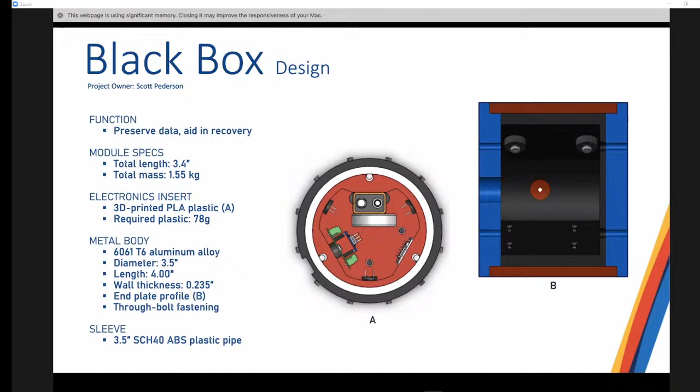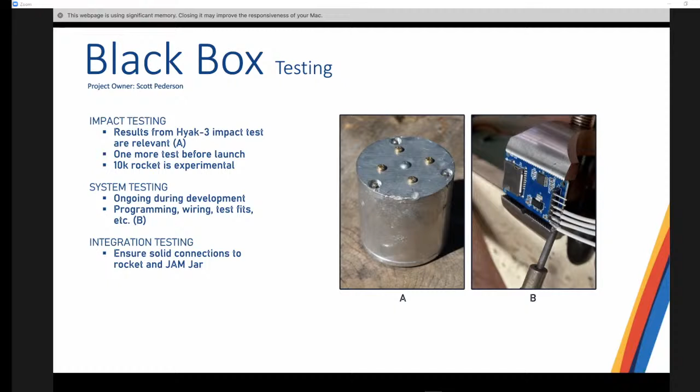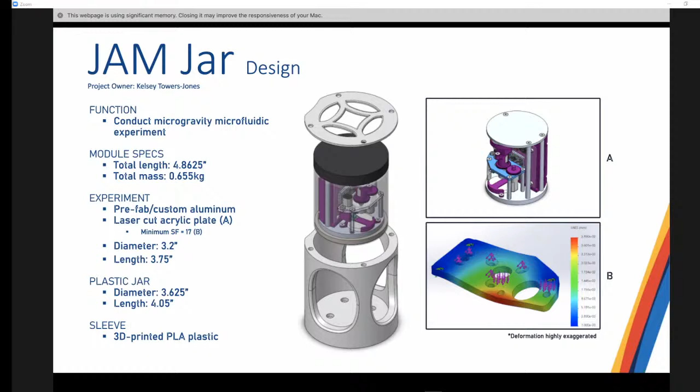Yeah, so the controls sequence is that, well, a bit of background, the batteries have enough capacity to support the system for about 19 hours. So that's not a problem. Basically, we can charge up the batteries and then leave the Arduino in its on state, just waiting for the trigger where it recognizes that apogee has begun. Basically, there's an accelerometer that will detect microgravity conditions. And once it's crossed the microgravity threshold, the Arduino will start spinning one of our control samples.

It'll put full power to our spinning motor, which will basically simulate 1G acceleration on one of our yeast samples so that it more or less doesn't experience microgravity while the other one does. And that's just during apogee, so that's only going to be for a few seconds. Then after apogee, the Arduino will turn off the spinning motor and turn on pumps that will pump formaldehyde into the yeast samples to basically kill them and freeze their genetic state in whatever it was immediately after apogee.

So that way, when we collect the assembly after recovery, we'll be able to sequence the genes of the yeast and kind of have a snapshot of whatever they were doing after being exposed to microgravity. Yeah, pumping isn't going to take much time at all. So the Arduino will turn on the pumps and then turn off the pumps and go back into its dormant state where it's just sitting there with everything off. Pretty simple control sequence. Next slide.

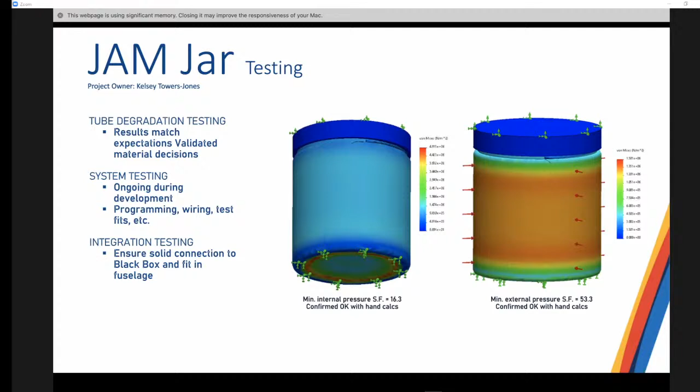Other testing is just similar: as we wire everything together, we'll be testing to make sure the sensors work and the code works as expected. And yeah, also just making sure it mounts to the black box properly. Next slide. Yeah, I can talk on this one.

So before you do, just one note about the microfluidics thing that I didn't put in the slides. For the electrical system, the batteries are 2 LiPo batteries wired in series to get like 7-something volts. I don't have a BMS wired in there currently. I didn't think I'd need one. Would I need one? If I plan on having the batteries charged separately, not in their series configuration, do I still need a BMS for when they're in use?

I think it's fine as long as you're not cycling them. That's when you run into issues. Okay, cool. Yeah. All right, thanks. That's all I had to say about JAM Jar.

Okay, awesome. So integration has already been mostly covered previously and in other subsystems. The JAM Jar mounts with 4 screws onto the top of the black box. The top of the black box has 4 threaded holes. Screws go directly into that. JAM Jar has no external connections because the purpose of it is to be a self-sufficient experiment. And we'll be needing the self-sufficiency more in later tests, later flights.

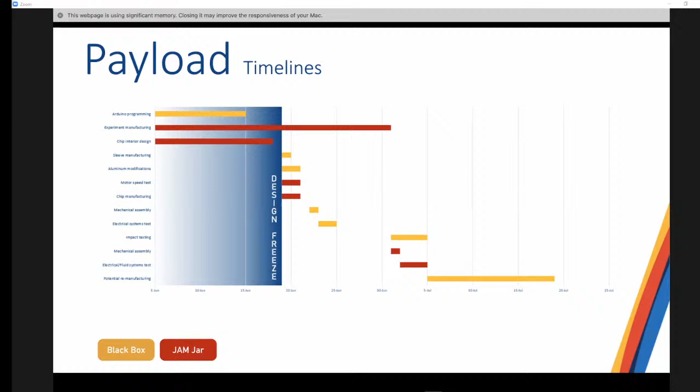And you can go to the next slide. Are there any last questions?

Oh, go ahead. Sorry. I think we might have the same issue with the strain gauge bulkhead and the wires, depending on how they can be routed. Because if we have to slide the strain gauge bulkhead in, then we need to make sure that we can feed the wires coming from the black box to the avionics bay through very narrow channels that have been left for the wires to go through. So I think we might need to revisit the wiring channels in the strain gauge bulkhead.

Jay. Yeah, I was thinking about that a little bit, and if it's wired in the way that I think it's wired, I'm pretty sure it's okay. Might need to make the channels in the strain gauge bulkhead slightly bigger if you're using thicker wire than I expected, but other than that, I think it should be fine. Was that all you had a question about, Aila? Yeah, no, that was it.

I think we're going to need to look at the strain gauge bulkhead though, because the wiring channels are really small. Once I get into 3D SolidWorks electrical, we can model the wires in there, so that's something we can look into. Cool.

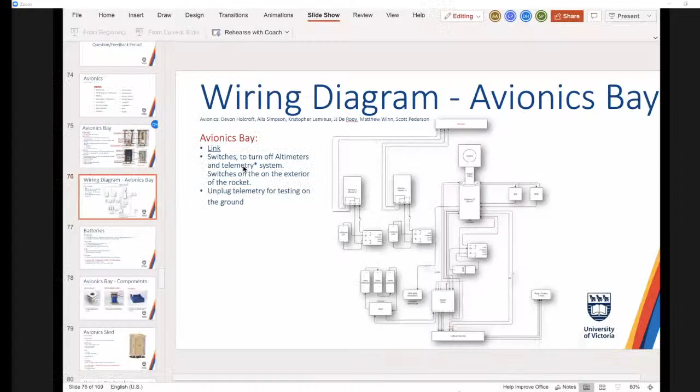I actually had another question that came up during some other presentations about the avionics assembly, in particular the antenna mounting to the fuselage and routing through the fuselage. That T, I don't know what you call that, but the T module in the middle of the antenna length, that looks quite chunky for mounting either on the fuselage or inside of it, and not interfering with either drag or any exterior features, and also the assembly of all the other bulkheads in the fuselage. If that makes sense. That is something we're trying to figure out.

Big Red Bee does not provide any size information, so we have no clue how big that T is. Devon took a best guess when he was making it in CAD, and all credit to him. Their picture does not even show the entire length of the antenna, so we can't do a relative size type thing, which is really annoying. Very much open to changing the antenna. That is just the one they recommend.

And so I didn't spec anything different, but hearing all of the issues that it's causing here, I think another antenna will be spec'd. We do need to figure out how it's going to interact with the transmitter though, because if we can't have a cable going from the outside to the inside of the rocket without interfering with everything, we're going to have some serious problems with having an external antenna.

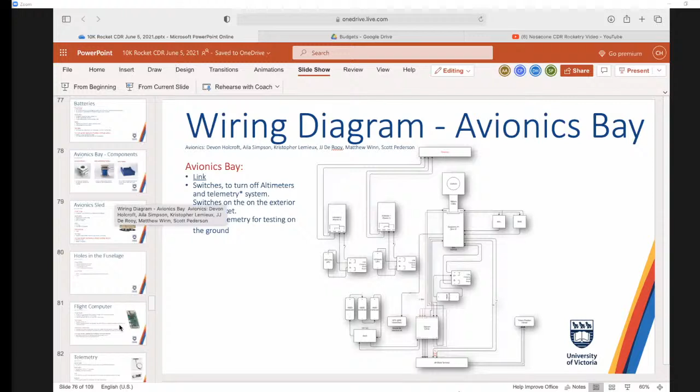So maybe that T assembly, if we call it that for now, is mounted on the avionics bay, and then the two lengths of the antenna have a similar soldering point like the strain gauges have, and then slip into place or are assembled afterwards. But maybe you could look at even just modifying that assembly to work. It's possibly a pretty cheap part, isn't it?

Yeah, I'm very hesitant to modify any antenna that we buy. One, because my radio license does not allow me to build radios, and I don't know if modifying antennas counts in that. But two, they're very specific lengths, and the way that they're built has a very large impact on how they operate, and I don't understand it well enough to feel comfortable taking it apart and putting it back together. If I had one in my hand and I could play with it, maybe.

How expensive is the antenna? $35 US plus shipping. I would almost say we get two, mess around with one, see if that works. But that's more expensive. Yeah, but if it's not going to work, then we may as well get another antenna. There are cheaper ones, and it is possible to build your own antenna. Again, after 3 months of research, I just don't feel like I understand it well enough.